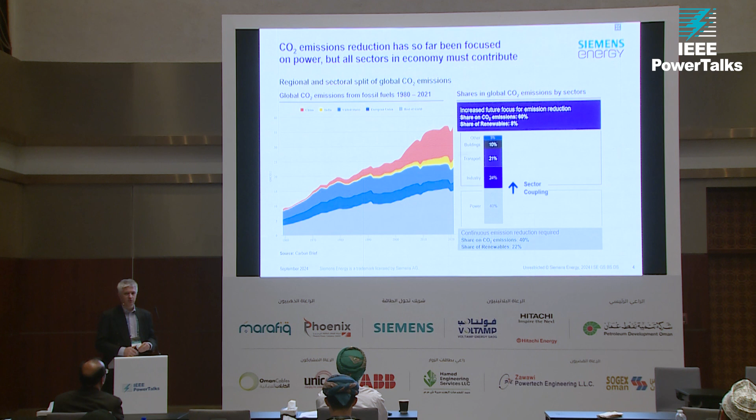So it contributes 40% of all the CO2 emissions in the world, associated with electricity production, and that is the use of fossil fuels, whether it's oil, coal, or gas. But it's not just the power sector. We also need to understand there are other sectors that are also contributing to CO2 emissions. And we have industry with 24%, transport 21%, buildings with 10%, and some additional other small items.

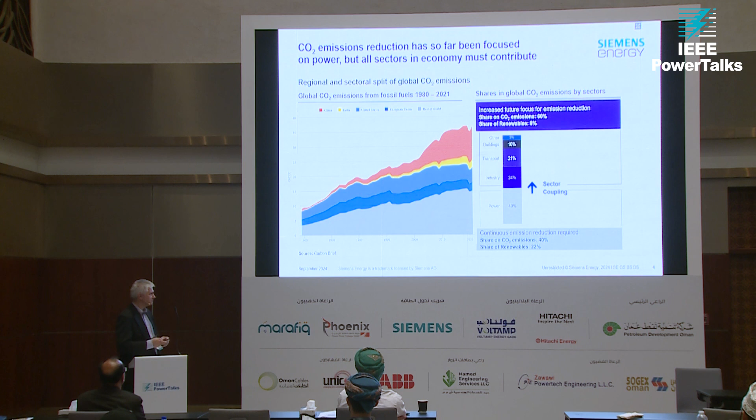So the big question is, how can we decarbonize? How can we reduce the CO2 emissions worldwide? It's not just about the power sector. The power sector is our responsibility, but we also need to look into the other ones. And the way how we expect this is going to happen is by a concept that we call sector coupling. And the concept of sector coupling is quite simple.

The idea is we have in the power sector access to green energy, mainly renewable energy like solar and wind. And we are not using this free sustainable energy just to power the power sector, but also give it to the other sectors in a way that they can use it. So the idea in the future is we're going to have green power as the center of all the energy in all the sectors. And that is, to a large extent, solar energy and wind energy. And a little bit of hydro, wherever that is available.

All the other renewable energy types like biomass, geothermal, are just usually a very small contribution and only available in some areas of the world. So it's mainly solar and wind, and both are unfortunately intermittent. They cannot be produced when they are required, but just when the sun shines and when the wind blows.

So the idea of sector coupling is to provide this sustainable energy to all the other sectors, whether it's industry, mobility, agriculture, you name it. And the best way to do that is by electrification. So the more you electrify other sectors, the more you can reduce the use of fossil fuels in the other sectors. Have a look, for instance, at buildings, heating and cooling. This can be easily achieved with direct use of electricity, whether it's for air conditioning units or in the colder climates with heat pumps, displacing natural gas, for instance.

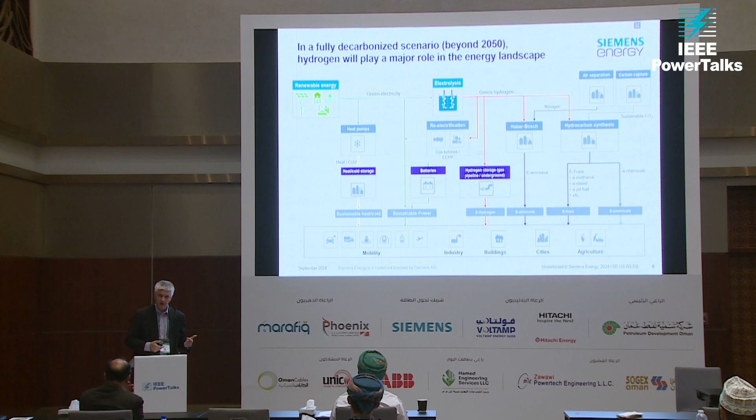And a sustainable source of CO2 could be either carbon capture from inevitable emissions, could be even better carbon capture from a biomass power plant, or in the future, very much under consideration also in our company, direct air capture, which is getting the CO2 directly out of the air. It's still a very expensive technology, but over time we expect this to become cheaper. And by using the sustainable CO2, I'm still producing a hydrocarbon which I will be burning, for instance, in an airplane. So it's not really decarbonized physically, but it's carbon neutral, and that's what we want because the CO2 then always is in flow and we're not adding additional CO2 to the atmosphere.

And synthesis process, I said, many different possibilities. Methanol is very easy to synthesize. Methanol can be easily used as a substitute for gasoline and diesel. But also jet fuel, very important. It's probably one of the largest future markets for hydrogen derivatives, jet fuel. Because for airplanes, the big issue is needing a very high density of fuel. You have a very limited amount of volume at your disposal in an airplane in order to drive the airplane. Remember that you have to carry all the fuel with you all the flight.

Electrification doesn't work. The batteries would simply be too large. You can maybe electrify a small general aviation aircraft, a typical Cessna, 4, 6, 8 passengers. Maybe long-term, a small regional 20-passenger airplane, but only for 200, 300 kilometers. So apart from island hopping, you need to go to a chemical storage of fuel. And hydrogen could be a possibility, but hydrogen comes with the disadvantage that you would need to liquefy it. And you also still have the issue of very low volumetric energy density of liquid hydrogen compared with jet fuel. And that is why probably the use of synthetic jet fuels, we call that SAF, Sustainable Aviation Fuel, will likely be the option to go.

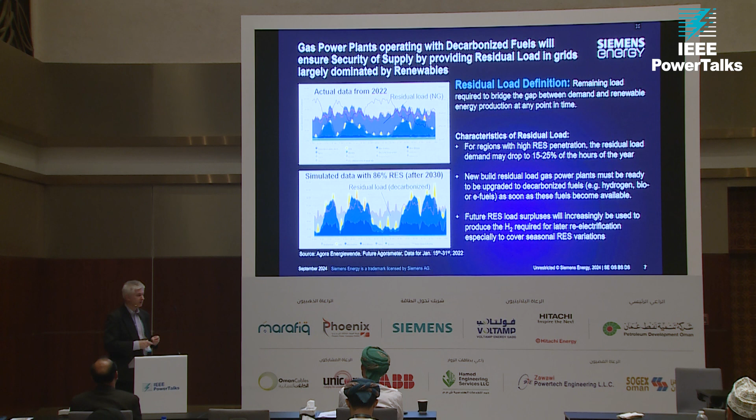And if we look now at some extreme situations, this is also Germany. January 2022, this is 4 weeks where we barely had any wind and any solar. This is an extreme. But these extremes tend to happen and will also happen in the future. Even more, if you ask some climate experts, they will tell you that with increased global warming, we're going to see more and more periods of extremely stable weather conditions, which means periods with large residual load demand may increase in the future. This was 4 weeks of nearly no wind and no sun.

If we do the same simulation with 86% renewables coverage, something that we can expect in 2040, 2045, we see that over these 4 weeks, we have only a few hours with surpluses. So batteries won't work, not at all. We need power plants that are capable of dispatching decarbonized power over several weeks, nearly in baseload. And that is where gas turbines and combined cycles have a role to play.

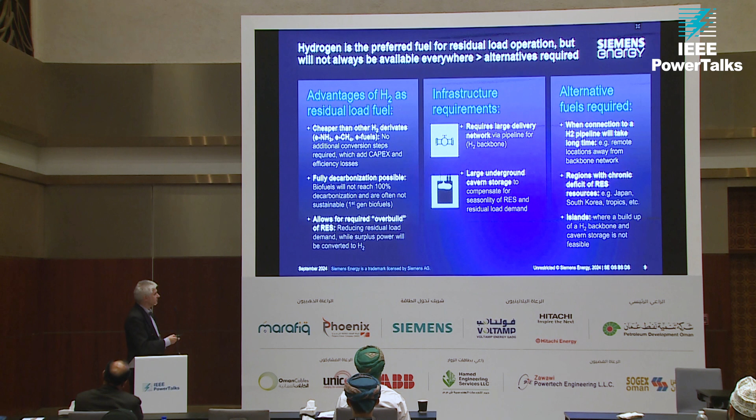Then regions with chronic deficit of renewables. That's not the case for Oman, but it's the case, as I said, for Japan, Korea, Taiwan, also the tropics in general. They tend to have very bad wind conditions and as well not much sun because it's always cloudy. And also islands. In islands, you cannot build up a large backbone network, and for geological reasons, you may not be able to put an underground cavern. So in those cases, we need to look into alternative fuels as well.

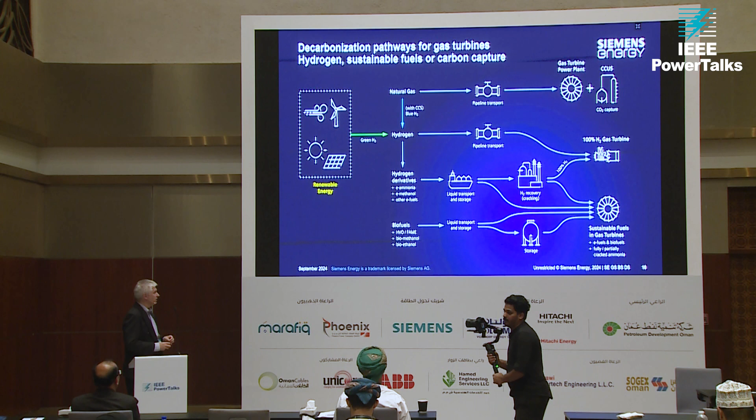The first possibility is you continue to run on natural gas, have a natural gas pipeline, and you run a gas turbine combined cycle with carbon capture storage. That's one possibility. Carbon capture, not an easy technology. It's a rather expensive one, but it works. It's very capex intensive and also opex intensive because you're losing 7–8% points of efficiency in the power plant.

But in locations where you have bad conditions for renewables, that means a large amount of hours of the year where you have to run these combined cycles, and you have cheap natural gas, and you have the possibility of storing the CO2 underground, then probably natural gas with carbon capture storage will be the cheapest alternative.

Then I have said we have hydrogen. Hydrogen, as I said, requires a pipeline, and then we can run hydrogen on a 100% hydrogen gas turbine. Hydrogen can be produced either from renewables, that would be the green hydrogen, or it can also be produced with natural gas with carbon capture, blue hydrogen. The gas turbines in themselves are color agnostic, so they don't care where the hydrogen is coming from, and blue and green hydrogen are chemically exactly the same. It's just a different origin and maybe a different carbon footprint.

With blue hydrogen, you cannot get 100% down in terms of decarbonization, because you always have to take into account the upstream losses of methane to the atmosphere, and as well the carbon capture process is not 100% efficient. Depending on the conditions, somewhere between 65 and 85, 90% decarbonization you can achieve with blue hydrogen.

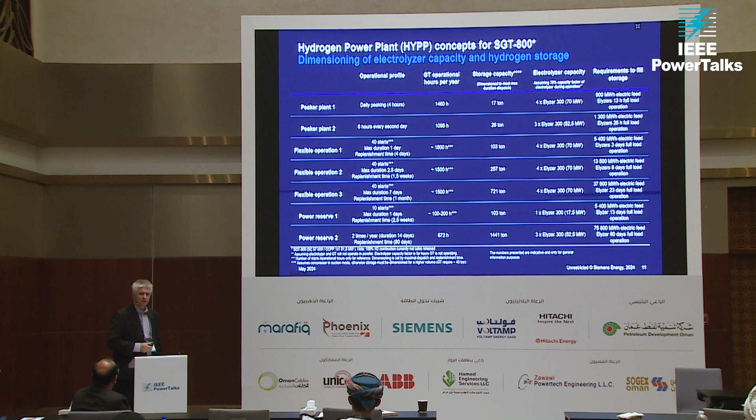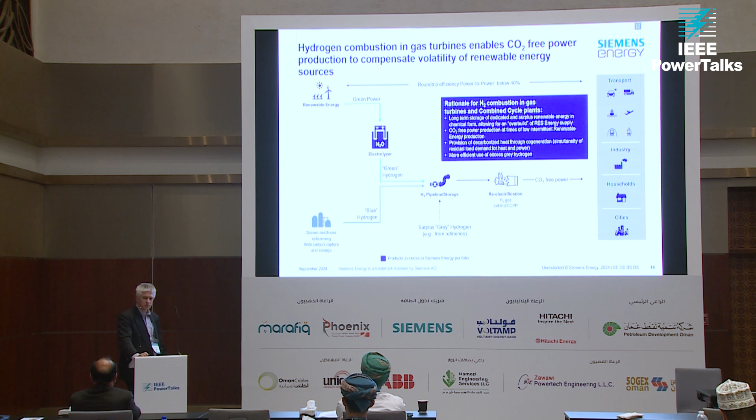Think about the use of air conditioning. We can easily use air conditioning during noontime, store that cooling, and use the cooling later when we come home.

Okay, now I want to burn hydrogen in a gas turbine. Hydrogen as a fuel in a turbine is not an easy thing to do. It is a very nasty fuel, to be honest. There are a couple of challenges associated with the use of hydrogen. You see them here on the upper left. The first one is something that we call hydrogen embrittlement: hydrogen attacks some of the steels, which with a good selection of material we can handle.

Then we have a lower volumetric energy content of hydrogen. Hydrogen is a gas that per volume has a lower energy content compared with natural gas. On a mass basis, it has a much higher energy, but on the volume, and that is usually what counts in a technical system, the energy content is lower, and that means we require larger flows of the fuel.

That means the pipes have to become larger. Easy to do if we build a new power plant. For an existing one, it's an issue because we have to make sure that the larger pipes really fit into the power plant.

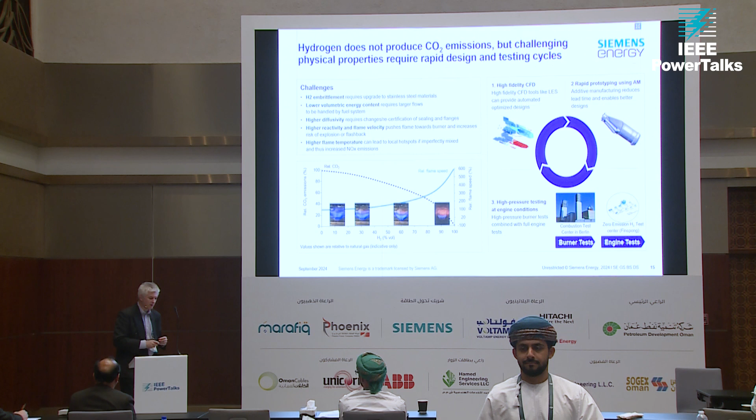That makes another problem. Turbine tests you cannot do everywhere because you need, again, a hydrogen pipeline, and there are not so many hydrogen pipelines in the world. And especially for larger turbine types, it is an issue. Smaller turbine types you can easily still do with some local storage, but once we go, for instance, into a large turbine, even one burner consumes around 100 megawatts of thermal energy. That's a huge amount of energy, and the amount of changes that we have to do to our testing facilities and adding hydrogen storage is massive. It's really a significant investment.

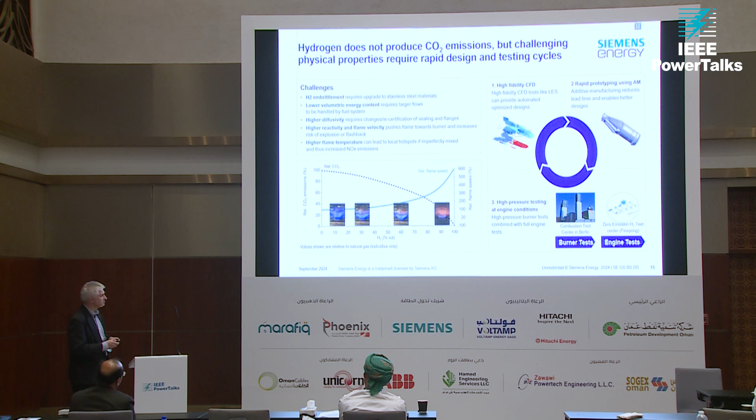So one important topic when I talk about hydrogen burners is that there are two ways of reducing NOx emissions. The first one is what we call DLE, and the other one is WLE. So dry low emissions and wet low emissions. Dry low emission is really you try to design the flame in a way that you don't have a significant amount of thermal NOx production, while in wet low emission you are using water injection or steam injection to control the NOx. In general, in the past, all the manufacturers used wet low emissions, which was easy to develop, gave a more stable flame, and had an additional advantage that you got a higher power output in the turbine.

Disadvantage was you have a very high water consumption, and you need demineralized water, and usually the water that you use for wet low emission is as expensive as the fuel, and especially in regions here like Oman, that is definitely a no-go at all. You cannot use these amounts of water. You have as well higher capex for water treatment and injection. You have a lower plant efficiency, means higher costs of electricity. You have still higher NOx emissions compared with the DLE mode, and higher maintenance costs.

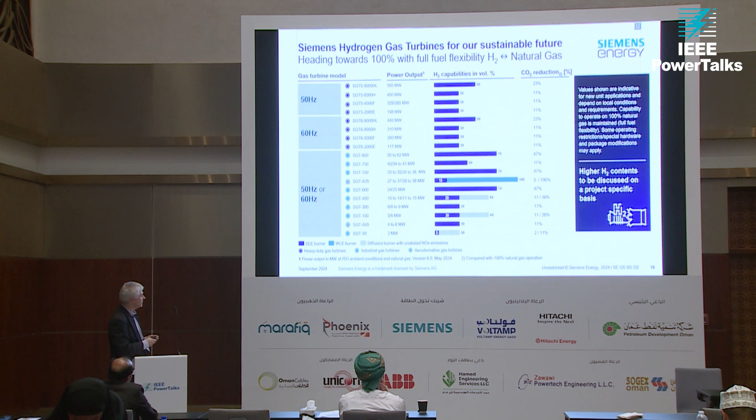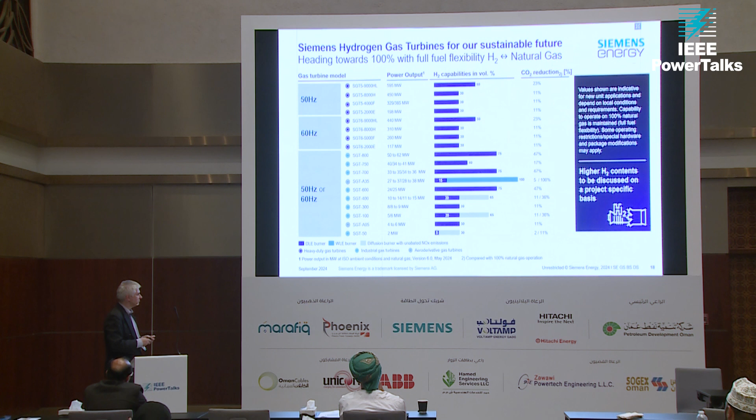On the intermediate size turbines, we're already at 75%, what we can offer. It's all dry low emissions. There's one turbine that can already run at 100%. That's an aeroderivative, A35, but in this case we would need water injection. That is something, as I said, we don't want to do in the future. So all our future hydrogen burners will be DLE only. And for the smaller turbines, we're again at 30%. And the goal now, over the next couple of years, is to move all these figures to 100% as soon as possible. And for that, we have a roadmap.

You see that we began to work on hydrogen nearly 20 years ago, beginning first with the use of different blends, increasing the amount of hydrogen combustion. By 2019, we centralized all the hydrogen activities around gas turbines. In the past, we had different engineering locations with different frame types. Everybody had their own hydrogen strategy. In 2019, we decided we're going to have one technology that we will test in one turbine, and then scale up to all the different turbine frames that we have.

So far, we already achieved 100% in 2019, and in 2023, we had the first real commercial test of a 100% turbine. And officially, we have promised to deliver 100% turbines by 2030.

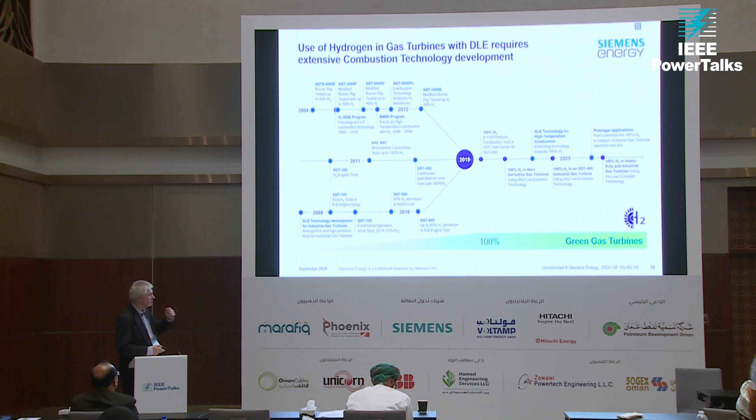Effectively, we expect that in the next few years, we're already going to be able to offer commercially 100% turbines. Not all of them. We begin with the most important frames. And by 2030, we're going to have several frames already with 100%. And over time, then we're going to increase the number of frames with 100%.

This is a slide showing all our references around hydrogen combustion, and this is only a slide with turbines that are really running on a combination of hydrogen and natural gas. We're not showing syngas operation, because you know that things like coal gasification, you have as well high hydrogen contents, but in this case you also have a high CO content, and carbon monoxide really reduces all the nasty effects of hydrogen combustion. So burning a syngas is very simple with 50% hydrogen, but burning a mixture of 50% hydrogen with natural gas is a very difficult task already.

So this is only pure mixtures of natural gas and hydrogen. Some of them are already in operation. Some of them were just testing for a couple of hours. But I want to show you some examples, both tests and commercial operation. The first one is our HyFlexPower. This is an existing cogeneration plant in central France that already had a cogeneration plant based on an SGT-400, which is a 13 megawatt turbine.

And in a large project, heavily subsidized by the European Union, and we had lots of different partners as well, we converted this power plant into a demonstration case for 100%. So we added one of our electrolysis units, an Elyzer 200, a compressor. There is a local storage, not a very large one, but at least a storage that could give us a couple of hours of operation. And then we changed the turbine, the core of the turbine, to a new core with the new burners that we have developed. And over 2 test campaigns in 22 and 23, we have been testing these new gas turbine burners with different blends of hydrogen and natural gas, concluding in September last year with a demonstration of 100% in DLE mode and running for several hours.

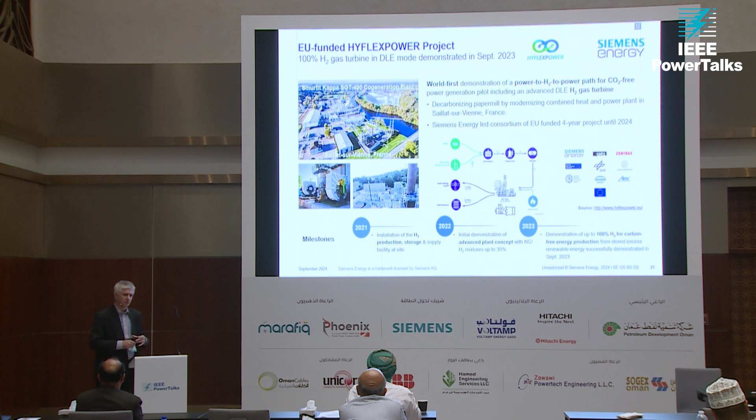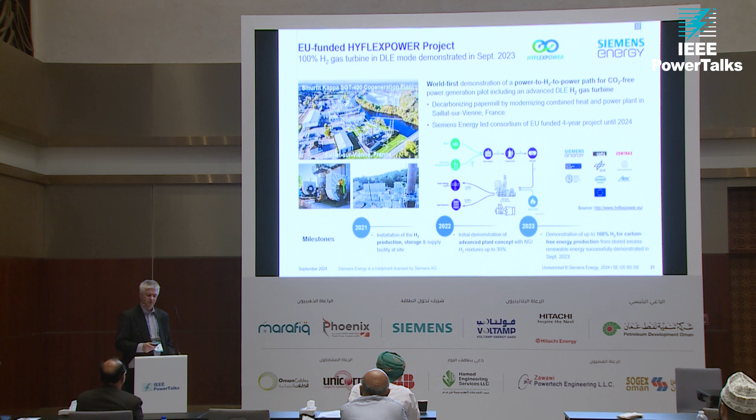Over the next couple of years, we're going to do some more tests, and we expect that for the SGT-400, in around 2 to 3 years, we should be able to have all the tests concluded so that we can launch that unit commercially into the market for 100%. There will be probably another type of turbine that will get to the 100% commercially earlier, already by next year. But you will probably hear in the press once it is achieved.

Another good example is a power plant in Brazil. This is a cogeneration plant with 2 SGT-600s. That's a 25 megawatt unit that is producing steam and power for a local refinery, and is using a fuel mixture that is coming from the refinery of around 40% natural gas and 60% hydrogen. And this unit is running commercially and baseload since 2022. It is achieving 25 ppm NOx regularly, and we even have an operation and maintenance contract. That means we are responsible to provide the refinery with steam and power. And in the last 2 years, it has run very well.

In the peak, we were able to run this turbine at 88% hydrogen, but that was the limit that the unit could achieve. At 88%, the flashback system said, that's my limit, and stopped the increased amount of hydrogen. A good example of already a very high amount of hydrogen being used commercially in a turbine, and not just for a few hours, but really baseload operation.

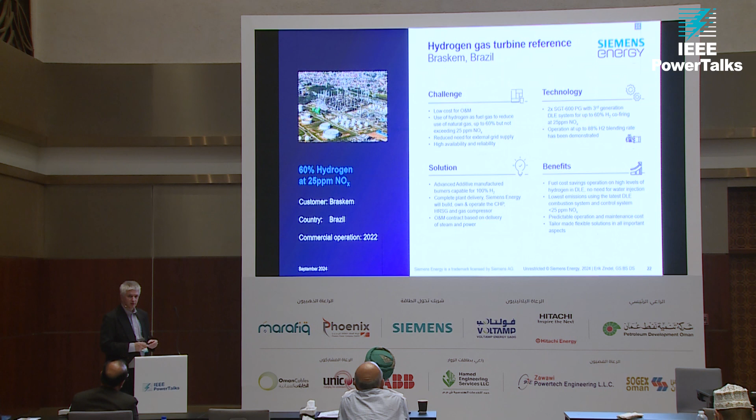A good example as well about testing is what we call the Zero Emission Hydrogen Turbine Center in Sweden, in the city of Finspång. That's where we manufacture our medium-sized turbines from 25 to 60 megawatts. At that size of turbines, we're still testing every turbine that leaves the factory. And so we have a test facility where all the gas turbines are being started up.

And because we also want to test hydrogen, what we've done is we have put a complete hydrogen landscape over there. So we have added electrolysis, we have added hydrogen storage, also a few solar panels, that's not much, also some batteries. We have as well all the LNG facilities that we need to run on natural gas.

And what we're using is, in normal operations of the turbine test center where we're producing electricity, which maybe the grid doesn't want to use, we can convert that electricity to hydrogen and store that in the tank so that we have it available for the hydrogen test that we maybe do a couple of weeks later. And that has already been in operation for 3 years.

The amount of hydrogen is not sufficient to completely fill a turbine, but at least what we can do in these turbines is sector tests. That means we're running a certain amount of burners with hydrogen and the rest of the burners with natural gas. And that gives us a better feeling of what happens inside a real turbine, if it's not just one burner test in a test cell, but really what happens inside a combustion chamber.

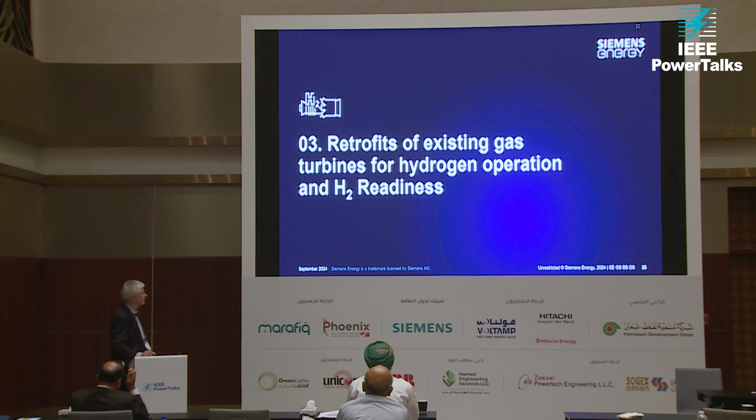So let's now look at the topic of retrofit of existing turbines. So far I've been talking about new turbines. That's easy to handle. Well, not so easy, but easier than with an existing turbine. But effectively we also have to look at the retrofit of existing turbines for several reasons. There may be some locations in the world where we might see blending of hydrogen and natural gas in the gas pipeline grid.

It's not something that will happen in Europe. Europe has made the decision to build a completely separate hydrogen network and keep the natural gas network completely with natural gas, meaning methane only. But there may be some other locations in the world that might see blended pipelines, and then every turbine connected to that pipeline system will have to use this blended fuel.

Then we'll likely see changes in legislation enforcing decarbonization of power plants. Think about what we saw already with the EU taxonomy discussions, where we're limiting CO2 emissions of power plants to 100 grams per kilowatt hour in order to be considered sustainable. Something else could happen, and then the operator would have to add hydrogen to achieve the CO2 emission limits.

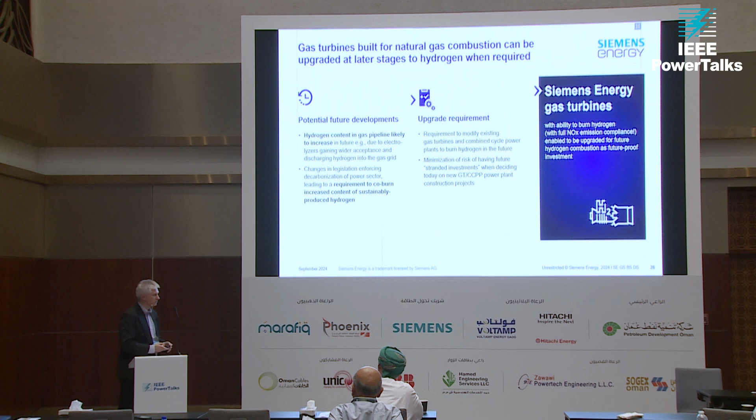So for every new power plant in the future, we have to expect that eventually this power plant will have to be converted to hydrogen operation. And that is why we're really looking very much at retrofitting of turbines. And retrofitting turbines is not a straight process. We really have to look item by item.

We have to really look into each plant: what are the upgrade requirements, what are the local regulatory requirements, operational requirements, how much hydrogen do we want to use. Then we have to do a due diligence of everything that has been installed, whether it's the turbine itself, but also all the auxiliaries. And then we have to analyze what changes are required in all the different areas. And only then we can really make a decision on which changes are really required.

Then we can prepare the upgrade project, do proposals, negotiate, and then we can work, install, commission. We have to do a new commissioning of the power plant with a new fuel. We'll also need a few new performance tests because of different fuel, and also topics about certification of the plant and permitting also need to be looked at.

So this is always going to be a project-specific evaluation. Technically, you can always convert any power plant to hydrogen. The question is, how much will it cost? And the higher the hydrogen content, the costs will probably skyrocket eventually. Think about what happens in the extreme case.

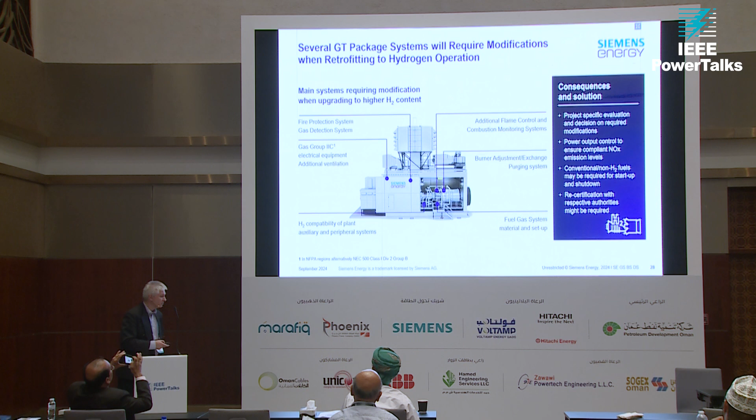And then as well, for all the systems, you have to look at permitting as well. You have to talk to the regulators. A couple of topics that you need to take into account. And because of all these topics, we have a concept that we call H2 readiness. And that is something that over the last 2 to 3 years became very important in Germany and as well in Europe. More or less became a standard.

And I first want to explain the terminology. H2 readiness means that I'm building a new power plant, but the power plant is already prepared for a later retrofit to hydrogen. That means the power plant is not yet ready to operate with hydrogen, because that would be the H2 capability. That's the actual capability to run on hydrogen, but I have already prepared the plant so that I can later retrofit it very simply to hydrogen.

Important topic, because even in our company I see lots of engineers saying H2 readiness when they mean capability and the other way around.

So I really want to make sure: 100% hydrogen readiness means the plant is not yet ready to run on hydrogen, but it's prepared for a later retrofit. And that means that everything that can be done beforehand when we build a new plant and does not really add too much cost, we rather do upfront, and we leave only selective topics for a later retrofit.

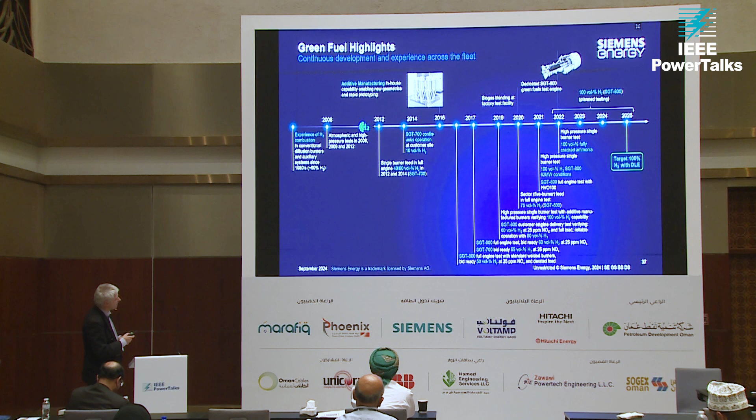This is a roadmap showing the activities on the small and the medium-sized turbines that we have. Medium-sized, you will see a higher activity on these decarbonized fuels simply because of the size perspective and also because they are quite often used in islands. They are more prone to be used for testing and decarbonized earlier compared with large turbines. But you see that we have been working not just with hydrogen, but as well with other fuels like HVO, FAME, ethanol, and I'm going to show you a couple of examples.

We have done a couple of tests at a power plant in Sweden with SGT-800 power plants with very good results. And we've just begun commercial operation of a peak load plant in Stockholm, also in Sweden, with an SGT-800 running on 100% HVO. So HVO is a very attractive fuel. Disadvantage, there's not a very large market for it, and everybody wants to use it because it's an easy drop-in for diesel.

There's another biodiesel, which is called FAME, fatty acid methyl ester, often produced, for instance, from rapeseed. This is a different fuel, a little bit more difficult to burn because it differs a little bit more from a diesel. And it also has the disadvantage that it is chemically not stable. So over time it degrades, and many liquid fuels you want to have stored in a large tank, maybe only for some secondary fuels. And obviously every fuel that you want to store for weeks or months in a tank has to be stable, and FAME is not, while HVO is.

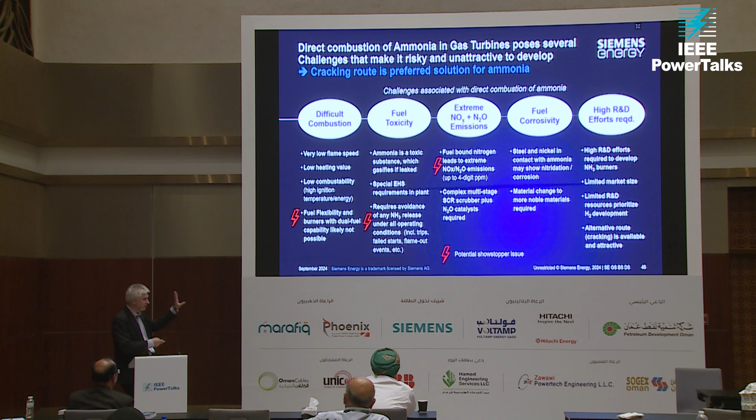And there is an alternative, which is called cracking. That is why, for the time being, although we're looking at direct combustion as well, we're more focusing on cracking as a solution to re-electrify ammonia. This is an example of some of the tests that we did together with some universities using our burners.

These are the technical comparisons between CH4, natural gas, hydrogen to the right, and ammonia to the left. You see heating value is highest with hydrogen, lowest with ammonia. Flame temperature is lowest with ammonia, highest with hydrogen. Flame speed, 0.07 compared to 0.37 and 2.91 on hydrogen. So it's a really big issue in order to ensure that the flame remains stable and doesn't blow out. And ignition temperature is much higher.

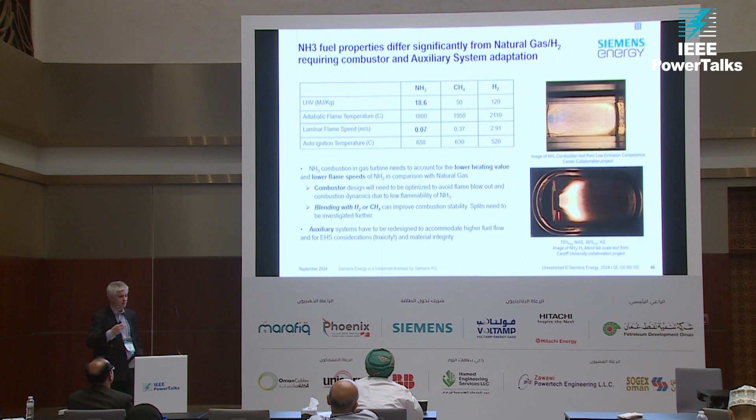If you run with ammonia, if you add hydrogen or methane, you can improve the combustion stability. It helps at least to keep the combustion more stable, but you still have the issue of all the NOx emissions that you have to manage. Looking at the NOx emission, depending on the equivalence ratio, you can see that the NOx emission levels can really get to a significant quadruple-digit ppm. And that needs to be managed.

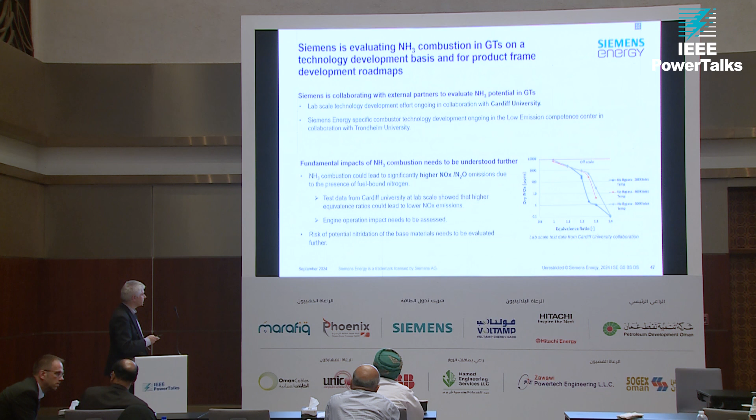You can manage it by having a different burner type, where you begin with a very rich combustion, then quickly switch to a very lean combustion. But again, this is a completely new burner type and will not be able to be run with other fuels. And we've done real examples, combustion tests with a burner of an SGT 750. You can really see here, depending on the equivalence ratio, the NOx emission levels, 2,500, 3,000 ppm, so factor 100 compared with conventional gas power plants. Not a very nice fuel.

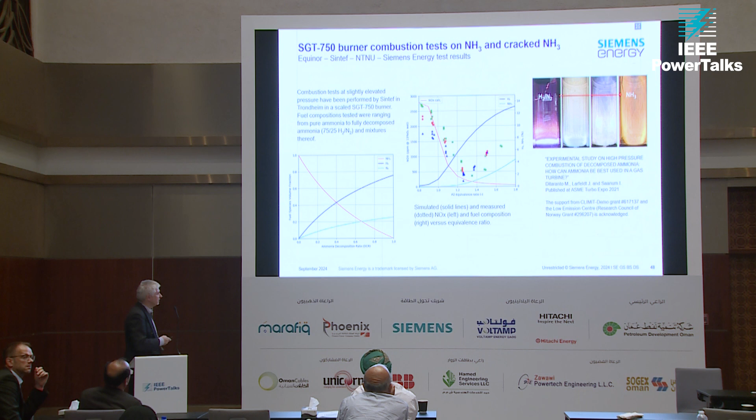And we have done tests as well with cracked ammonia on an SGT 750 burner with very good results, by the way. Even when we talk about cracked ammonia, what we're putting into the burner is not 100% hydrogen. It's a combination of hydrogen and nitrogen, so separated molecules, 75% hydrogen and 25% nitrogen. And that is interestingly much easier to combust than 100% hydrogen, because the nitrogen reduces a little bit the reactivity of this fuel.